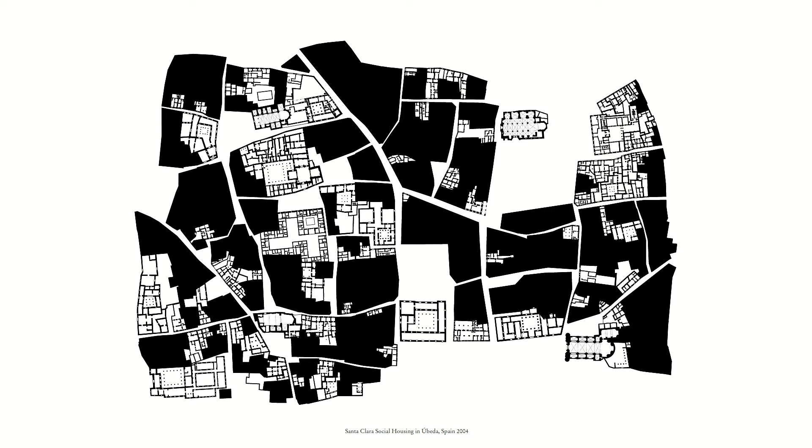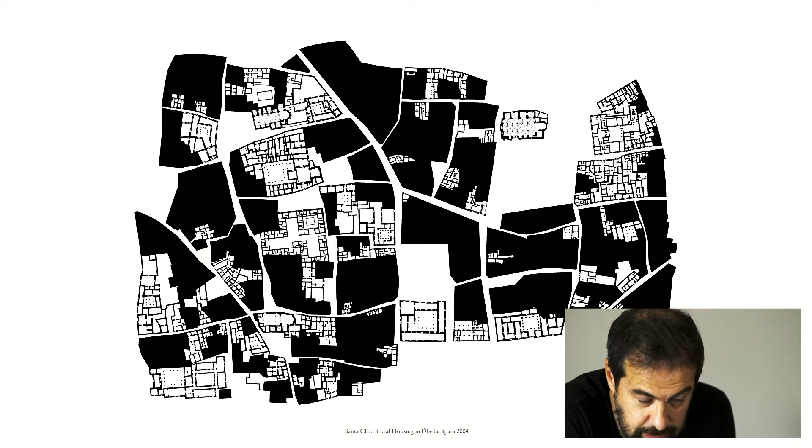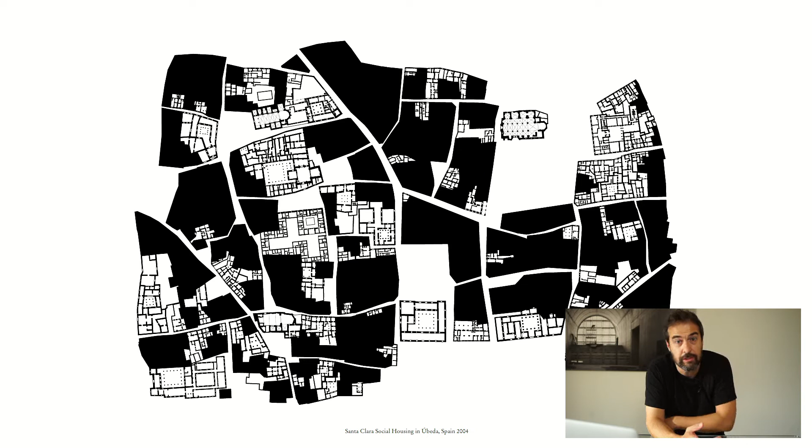In a way this project marked our attitude towards architecture. Since the beginning we tried to work with what we found—with the specific condition of a place, establishing an intimate relationship with the context, whether physical, imaginary, or with the different realities that exist in a place. This idea of working with specificity marked all our early career.

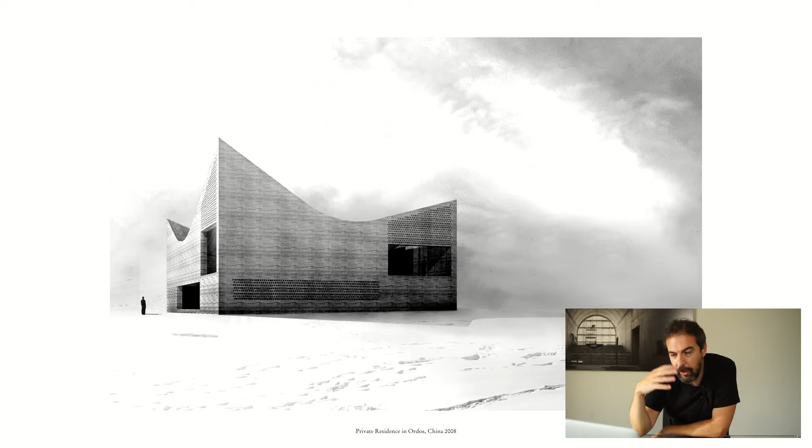In a way our work is based on this idea to work with what we found, with the specificity of the place, but at the same time we are conscious that architecture is an autonomous object.

So at the end our project is based on a dichotomy. On one side we try to find an intimate and sensible relationship with the specificity of the place, but on the other hand we try to give a certain formal autonomy to the building. Exactly in this dichotomy, in this paradox, is where our work is placed.

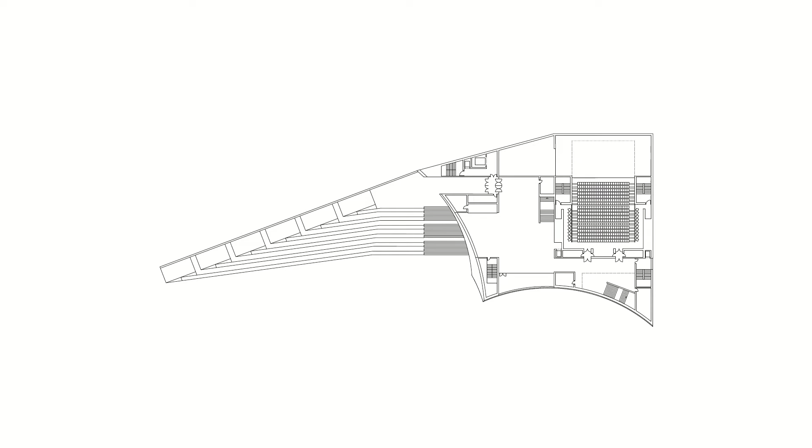And the architecture works as a frame to conform this kind of new urban condition. Here, for example, this huge long ramp and stairs are the urban element able to connect the object through its contextual condition, and it marks the beginning of a promenade, a public promenade that goes inside of the building. The interior, the foyer, was considered a covered plaza open to the sea, from where other connections move to the upper level.

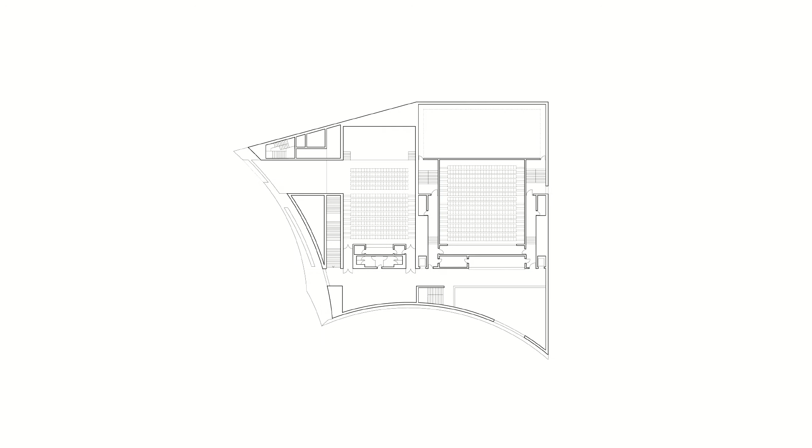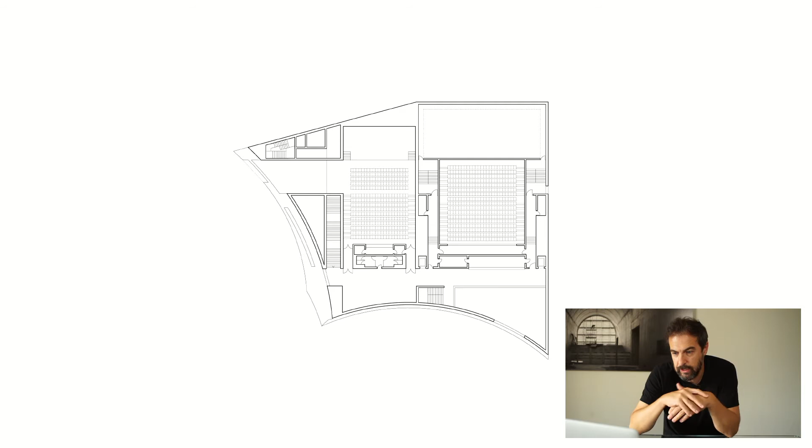All our projects have plans trying to be very simple, very synthetic. They try to solve a complex program through a very simple form. Here, the plan shows very clearly this duality that exists in the project. From one side, how the project is facing the geography, the sea, and on the other side, how the building conforms the new alignment for the city.

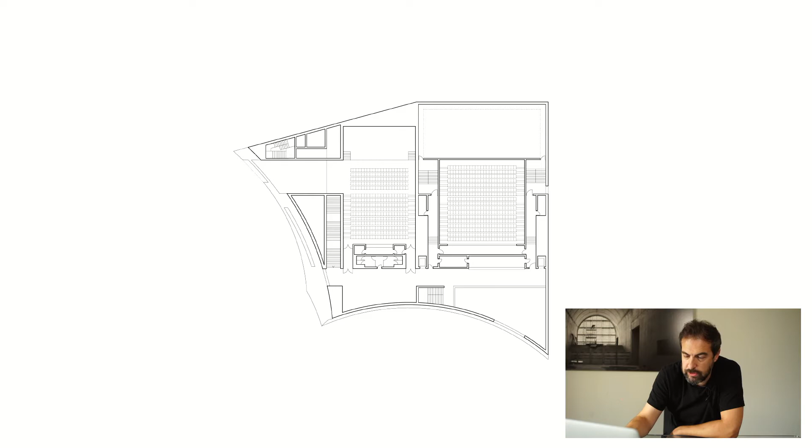With just these two elements, all the project in a way is solved. Interior, there was a small theater that is present in this image. More or less in the same year, in fact we finalized this project at the same period as the previous one. We made a project for a small, let's call it, office building that controls a quality wine in a small town in the north of Madrid.

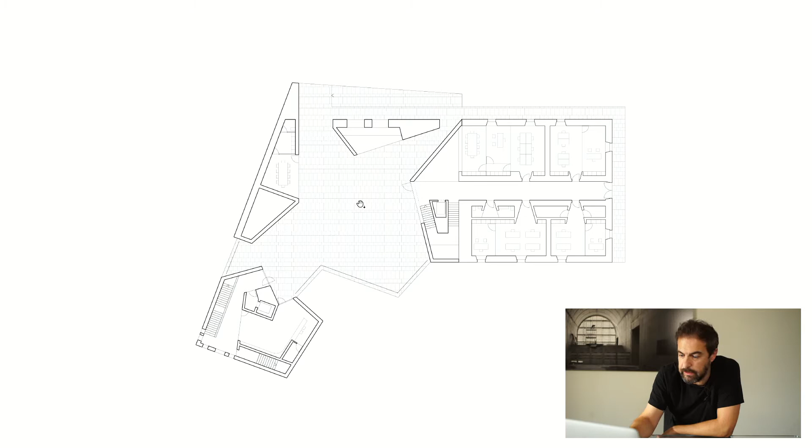This condition, you can find this kind of reflection not only in this project, but also in all our projects. There are these efforts to integrate a new contemporary architecture into a historical condition, discovering new scenarios, new possible ways of new possible architecture.

After these first two projects, which have been quite important for our career, we started to work around Europe, especially in Poland, and then in the latest year in Switzerland. The very first important international project we made was a Philharmony in a city called Szczecin in the north of Poland, very close to Berlin.

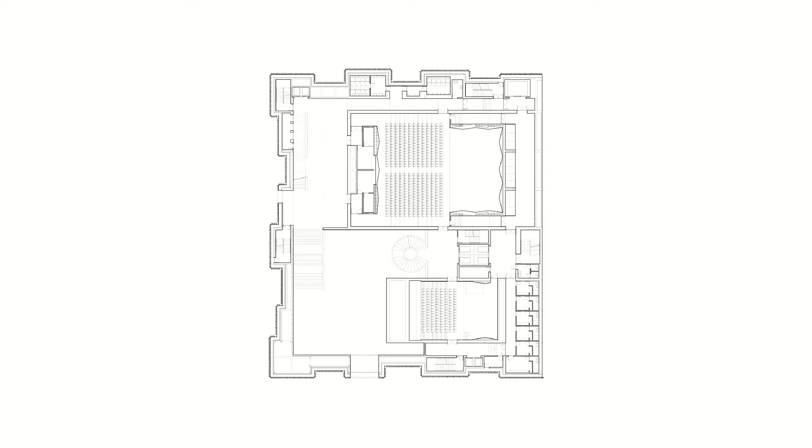At the end, the project worked with the same identity elements that conform the neighborhood—this building very close to the Philharmony has repetition, verticality, steep roofs. All these elements that conform a certain local architecture of the city are in a way present also in the new Philharmony, transformed into a new condition. Again, this is a very complex project, but it is solved in a very simple and precise way.

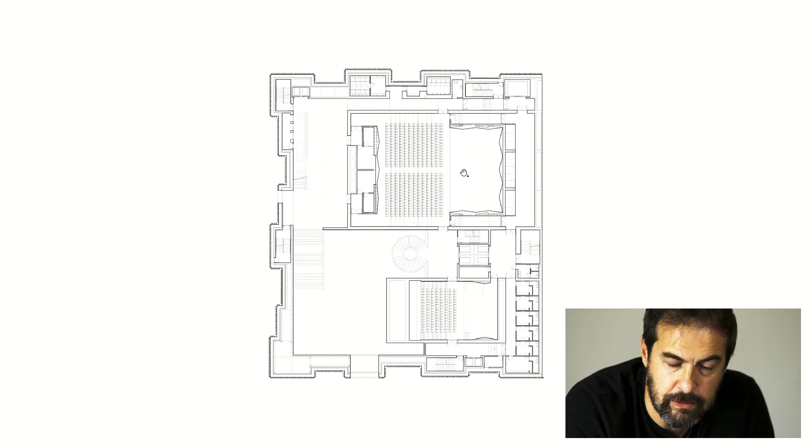There is just this crown that contains all the technical and vertical connections. This crown generates an interior open area, some kind of public space, and the two main uses, the chamber hall and the Philharmony hall, float inside of this void.

So in this case, the public space goes inside of the building. The foyer is conceived like a covered plaza.

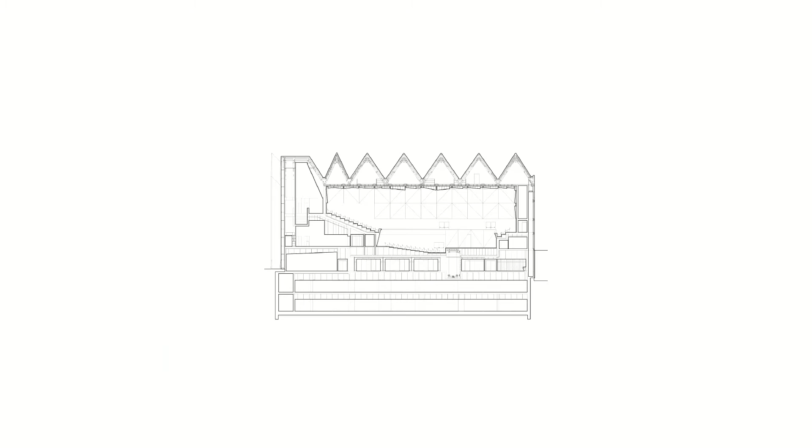Then the other important use of the Philharmony, the big Concert hall, is essentially a reflection about a certain historical typology of concert hall from Eastern Europe. A certain idea of ornament present in historical chamber concert halls has been adapted and transformed, using fragments that are ornamental but at the same time technical elements that help achieve the best acoustics inside this room. Again, it's a reflection about a certain specific tradition, even in these interior spaces.

The project was really the first step of a big urban renovation of an entire part of the city, and for that reason the project changes its appearance during the night. It tries to express the interior activity of the project and make an effort to renovate this area.

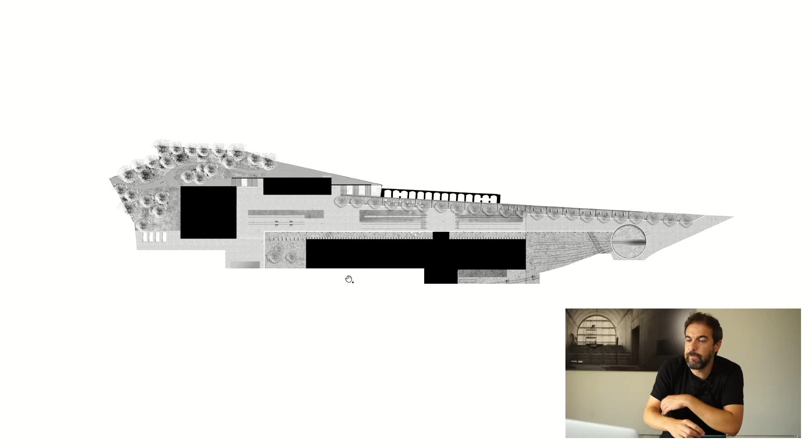The competition and the project were about creating a master plan to organize, in this huge site, the three main museums that exist in Lausanne: the Fine Art Museum, the Museum of Design, and the Photography Museum.

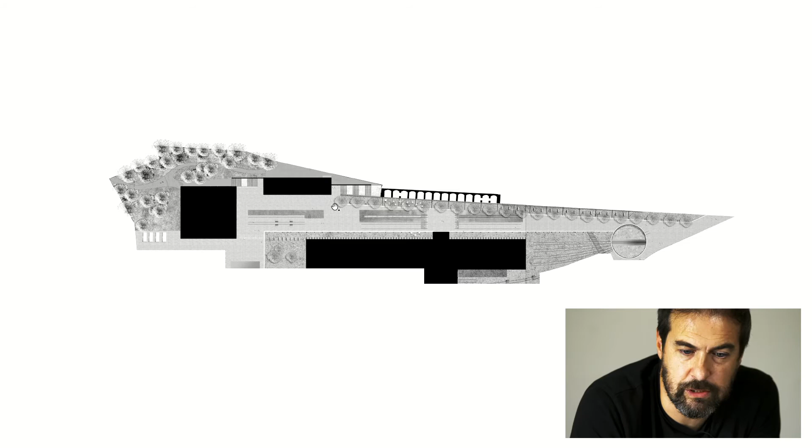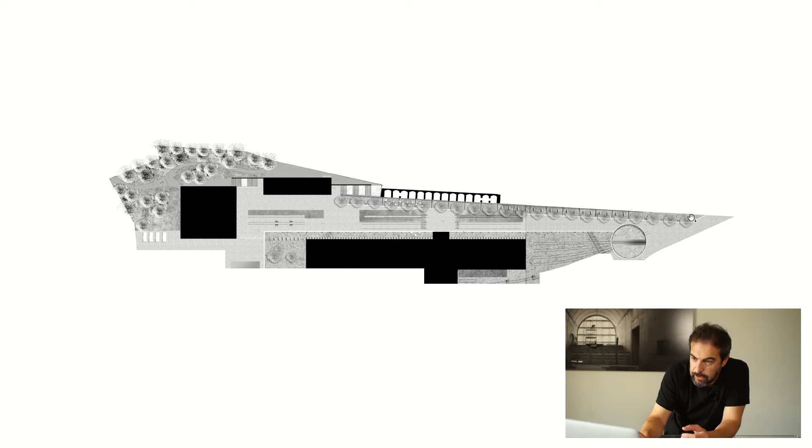This drawing clearly represents our strategy. At the heart of the project, we defined a long plaza, a long esplanade able to connect with the plaza in front of the station, and with this element the effort was to link this new district for art with the city. The three museums essentially conform the frame of this new urban space, similar to the project I presented before, but at a different scale.

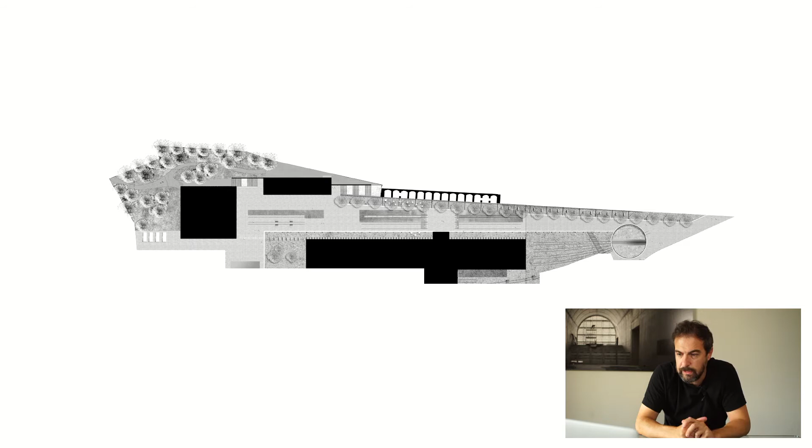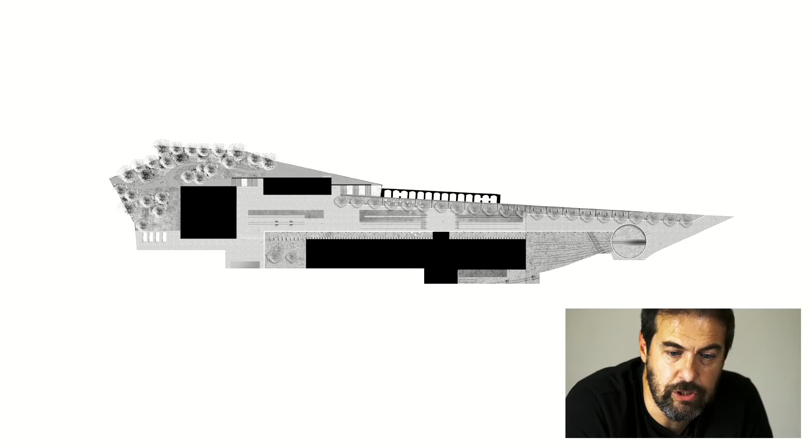This strategy was really important for the project, representing its first step, clarifying the urban condition of the site. After that came the Museum of Fine Art, here—the concept for the museum arrived in a very simple way.

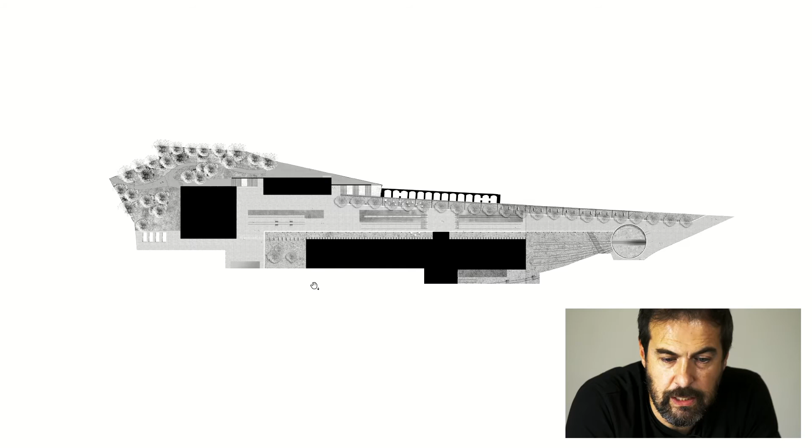The project sits along the railways and has an inhabited wall, able to conform this new public space and to protect the public space, and also to protect the collection hosted inside the building from the railways.

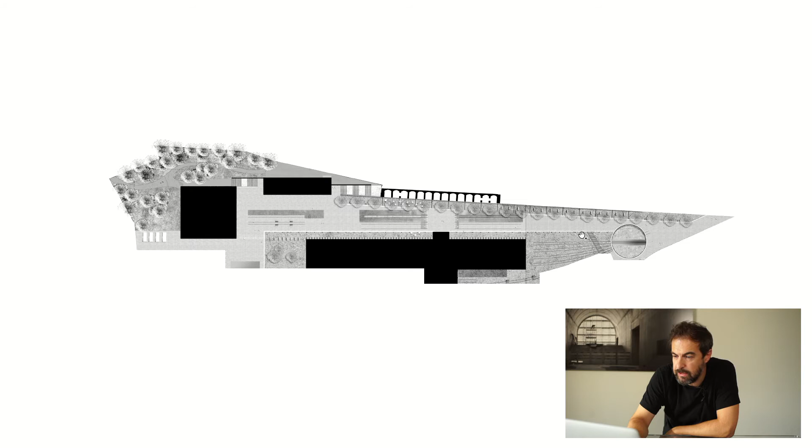In order to elaborate this strategy, several old buildings have been demolished, but we preserved certain fragments here, there, and also this one, because our intention was to conform a collection of fragments of the historical building to give continuity to the memory of this site.

In spite of the dimension, the building sits perfectly into these urban settings, and if we go closer, the building works again with the specific condition of this place.

There is a certain industrial resonance in this project. We wanted to preserve this industrial atmosphere that was present in this area, which essentially was used for the maintenance of trains before.

So the museum is this kind of long inhabited wall, very abstract in a way, an independent building, but trying to reuse this industrial atmosphere to conform the new project.

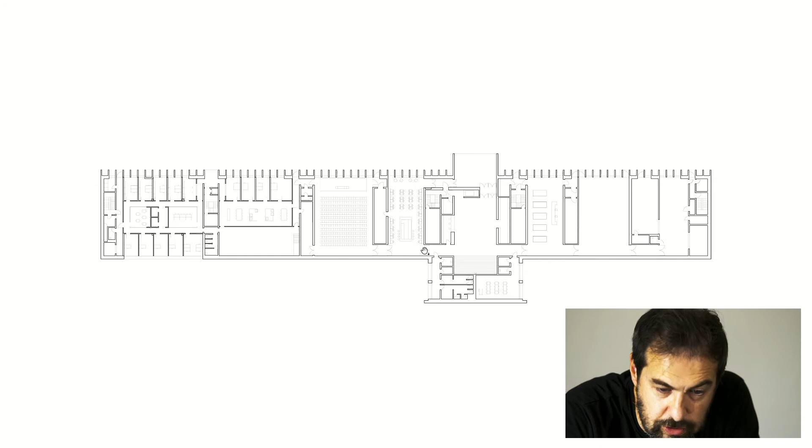Here on the ground floor, you can see that essentially the entire ground floor is composed of public uses: the auditorium, restaurant, foyer, etc. This kind of vertical element gives abstraction to the facade, but at the very end what it permits is to achieve huge permeability between the exterior public space and the interior.

The fragment of the pre-existing building is the key element because we reuse it to conform the new foyer, the main entry of the museum.

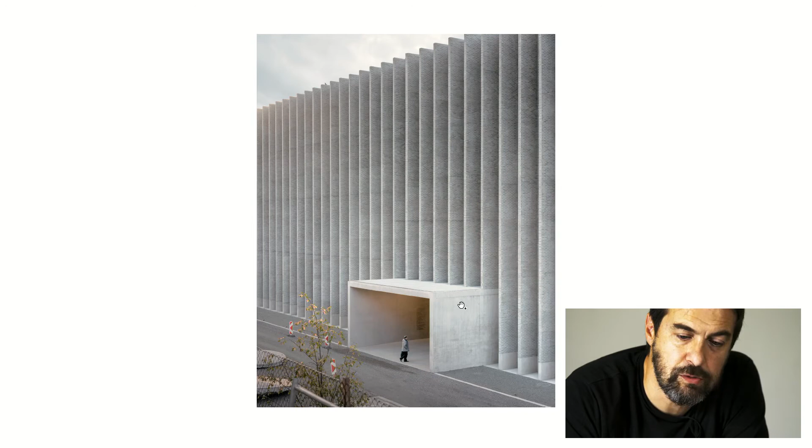From one side, this entry is marked through this simple porch that opens a void into this vertical rhythm. And when you arrive here, you discover the new foyer.

Work with what you found, discover what is specific and identity-giving in a place, give continuity to this element, and transform it into a new scenario. I think this foyer expresses quite clearly this effort that is present in all our projects.

Around the foyer there are vertical connections, some small spaces before arriving at the gallery, that work with light and simple materials. The exhibition on the first floor, the galleries, are very informal in a way, and they bring light from the north facade and in between the vertical elements.

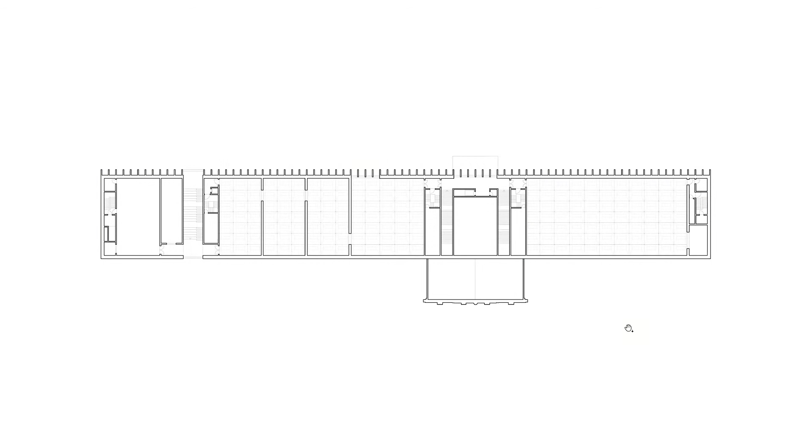The upper floor is essentially characterized by zenithal light. This plan shows the effort we make to design very simple architecture—this huge museum is composed of just five cores that define the main spacing.

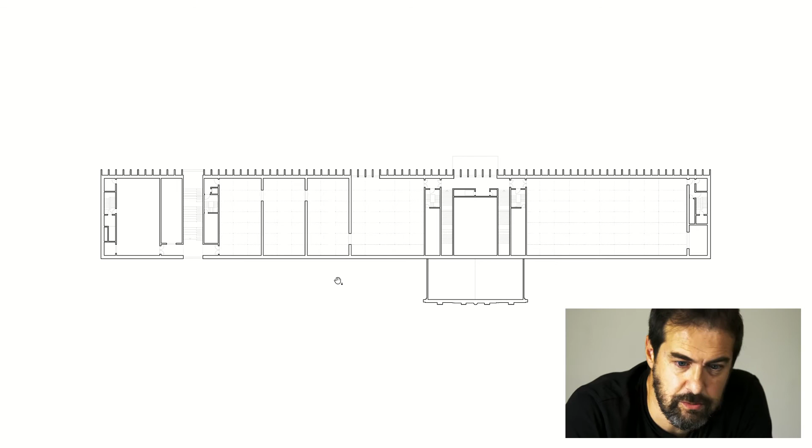In a very pragmatic way, this divides the space between the temporary exhibition and the permanent collection. Everything is very pragmatic, about the reduction of the element to its minimum.

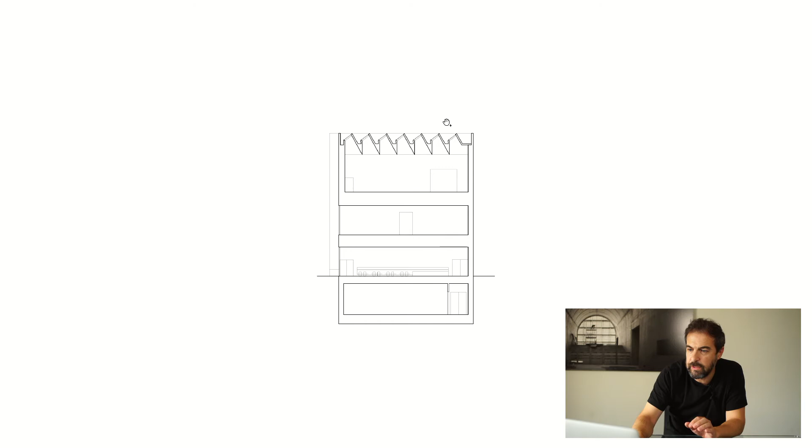The main feature of this second level is the rooftop, conformed by a very complex skylight that brings light from the north, and the entire gallery is characterized by this element.

More or less in the same year, we also made another fine art museum in a small city, always in Switzerland, in Chur, a small city close to Zurich. In this case, the project was about an extension of a historical museum.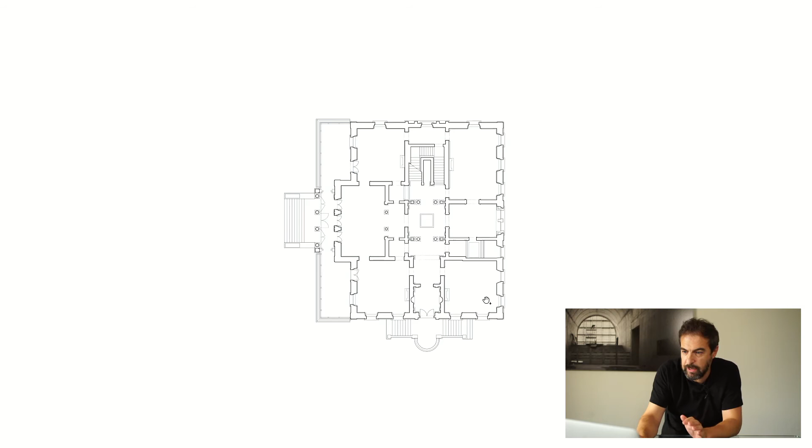The plan, as you can see here, is directly inspired by La Rotonda of Palladio, with a double symmetry that marks a very clear central void here. And the decoration around the building has this kind of Orientalist condition.

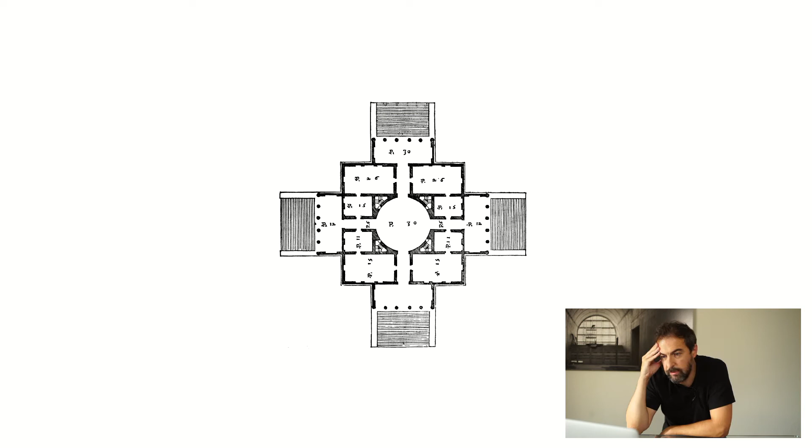So these two conditions marked our approach to the project in a way. First, this idea of a kind of absolute architecture—this is the original Palladio La Rotonda, conformed by this double symmetry, which became important in our reflection. Step by step we started to imagine that the extension of the historical museum should work as a diptych. The same identitary element of the pre-existing building should also conform the new one, so the old and new can create this kind of new diptych, in a way.

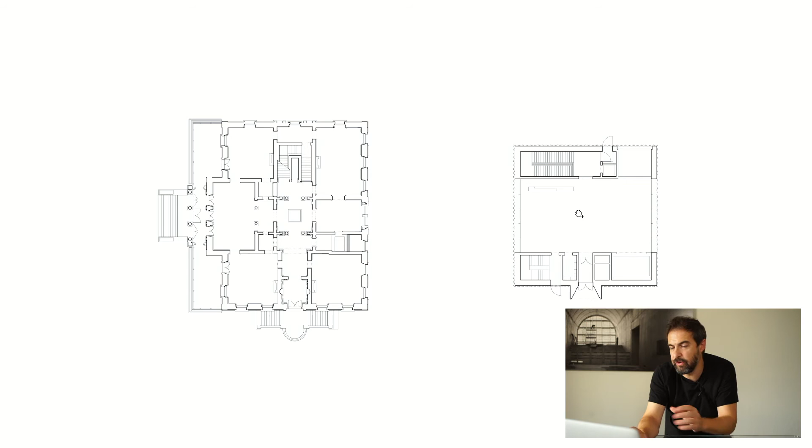Here is the plan that shows the new ground floor of the extension. The geometry is exported from the original building—it's an element that again works with a double symmetry. Everything is combined in just two very simple cores that define a central foyer, a small covered plaza. Again, the whole project is very reduced and synthesized into just a few elements.

So at the end, I present this project as what we could call a neo-Palladian building, because the plan is directly related to the historical villa, and the ornament that marks the facade is inspired by this kind of Orientalistic motif.

Again, it's a building that conceptually works with the same elements we found there, but transforms them into a new architecture. And even if it's difficult to notice here, we tried to reduce the footprint of the building as much as possible in order to generate this kind of mineral garden around it, a kind of basement that supports the new architecture.

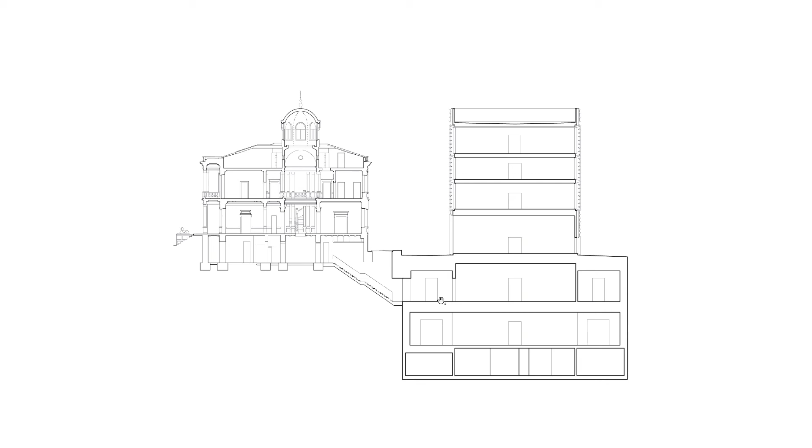In order to generate this public space, we took a very radical decision: the main exhibition area is underground, and what appears outside is just the public uses. This way, we can adapt the scale of the building to the historical building and conform the new gallery in a more general area.

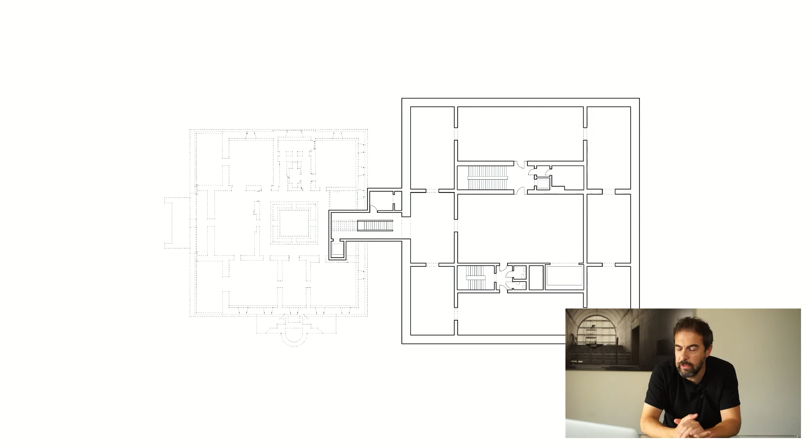The foyer is directly related to the historical building, with the main stairs going down in concrete, and then we arrive at the level of the permanent gallery. This plan shows quite precisely this sequence—the composition is composed of a sequence of rooms following the idea of aggregation present in many Palladian buildings, so the relationship with the historical building is quite clear in a way.

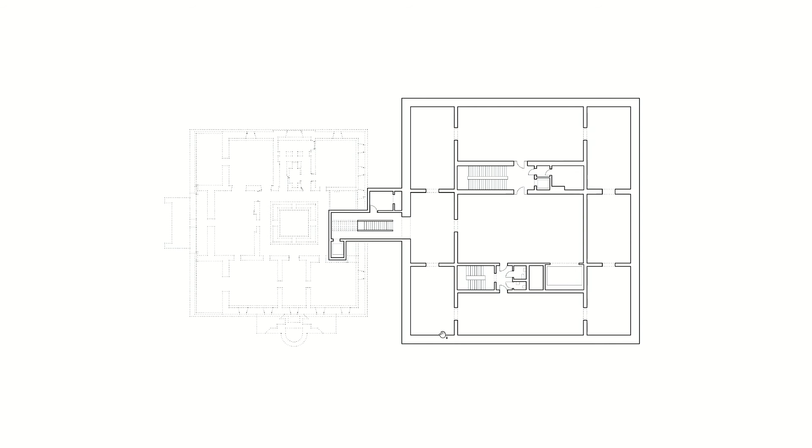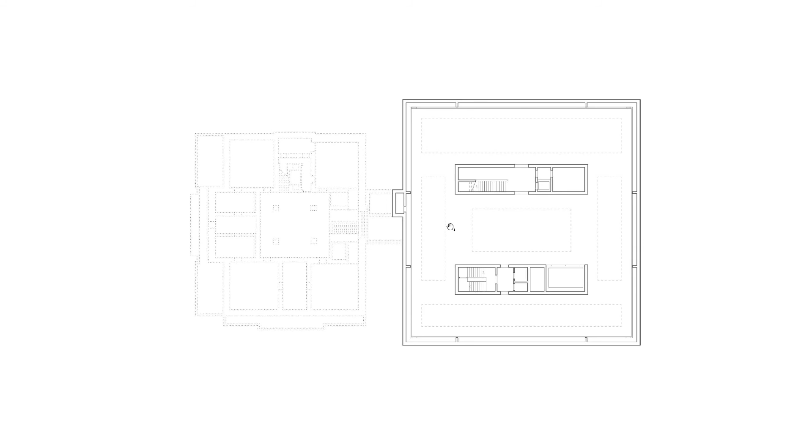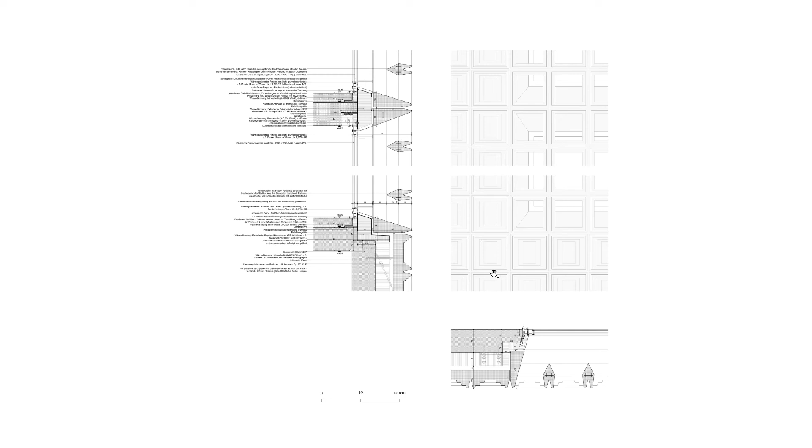This kind of bas relief conforms this kind of ornament, but at the end it's not an ornament because it's something that permits hiding all the technical elements that appear on the facade. It's composed by prefab concrete elements. You can see in this detail that it's carved and conforms this kind of square shape, that conforms this vibrant surface.

The entire concrete facade is working in this way. So sometimes it's just a mass, sometimes it hides windows, etc. And we use the same motif also to mark the delivery door. That is the unique element that creates a dissonance inside of this double symmetry that organizes the entire project.

This element is quite relevant because in order to reduce the footprint, in order to create the plinth, in order to give the right scale of the building, we took a quite radical decision: that the foyer is the foyer, but at the same time is the delivery area for the museum. So this element is, at the very end, the element that permits the entire project to work in a very good way. For that reason we marked this special element into the project.

The last project, the most recent project that we have finished, is a Dance Academy in Zurich, Switzerland. It's a small project that sits along the Limmat River in a very beautiful and fascinating area. It's an area that was an industrial area, but during recent years there has been a huge change. So it's a context full of different buildings, industrial buildings mixed with new residential buildings, etc.

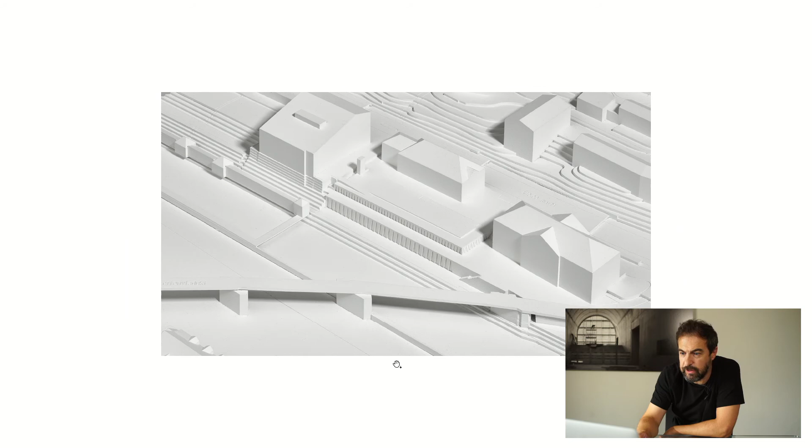Here in the model you can see that in this case the project doesn't define an object, but defines a topography. Our intention was really to generate a new public space along the river, permitting citizens to move again along the river, but also at this level and the upper level, and give again prominence to the historical buildings that sit in this way.

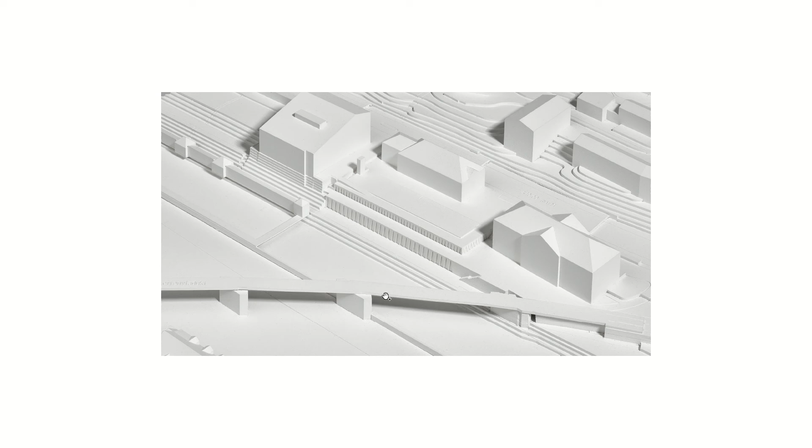Here you can see how the building is inserted with this element that represents a historical bath in wood, very, very beautiful. Here there's a passerelle, around here there's another bridge, metallic infrastructure, etc. All these kinds of infrastructure mark, in a way, the form and the shape of the building.

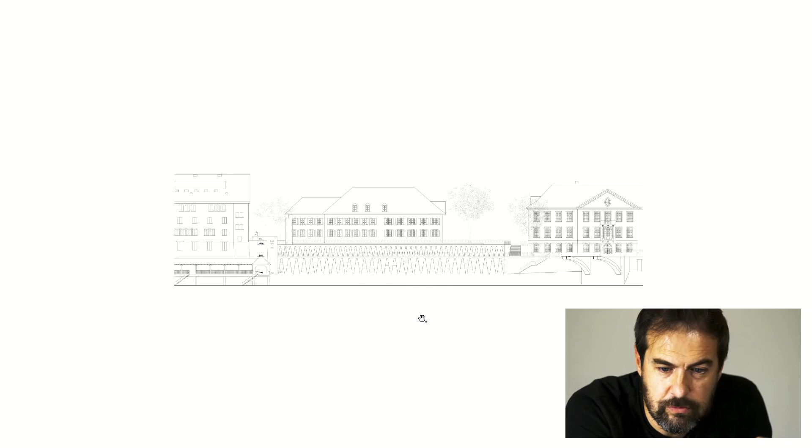In this early drawing you can see the relationship, the attempt to establish some kind of relationship with bridges and this infrastructure that marks the site, and also the effort to create a building that is just topography, avoiding achieving too much prominence in respect to the historical building. So the building at the end is just a plinth, above which sits the other residential building.

The effort of the project was really to reactivate this area, to recreate a new promenade along the river. For that reason we moved the entry to the Dance Academy from the upper street to this new level, forcing people to go down, arrive at the river, and enter into the new foyer located in this area. The effort again was really to make a simple building able to create a new part of the city. There is one specific thing for this project that is really important.

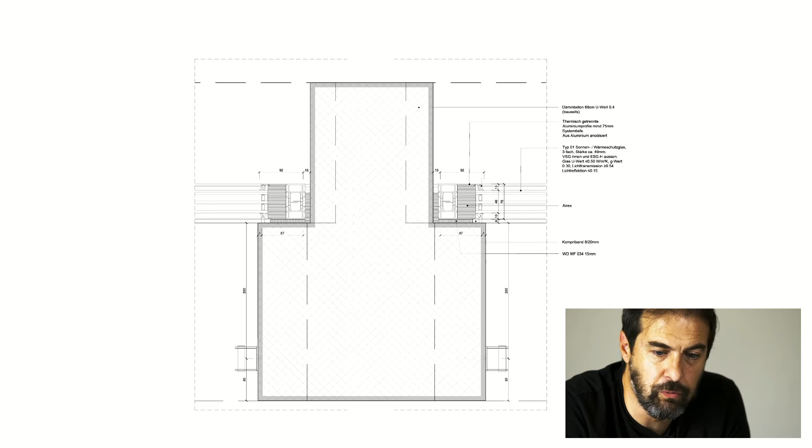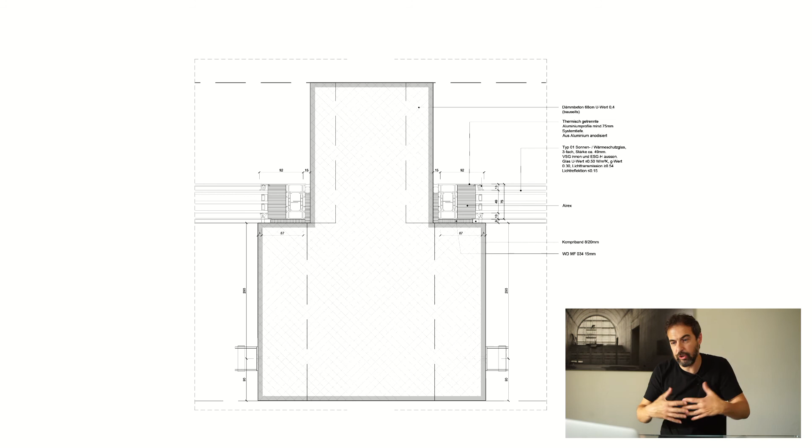Everything is built in concrete with insulated concrete, so there's no layers of insulation. It's just mass in concrete, and the frame and the carpentry are just connected with the concrete structure. This is an effort to really work just with structure, to reduce architecture to structure and nothing else. So this detail conforms the entire project. It's like this in order to avoid thermal bridges, and it's the element that organizes absolutely the entire project.

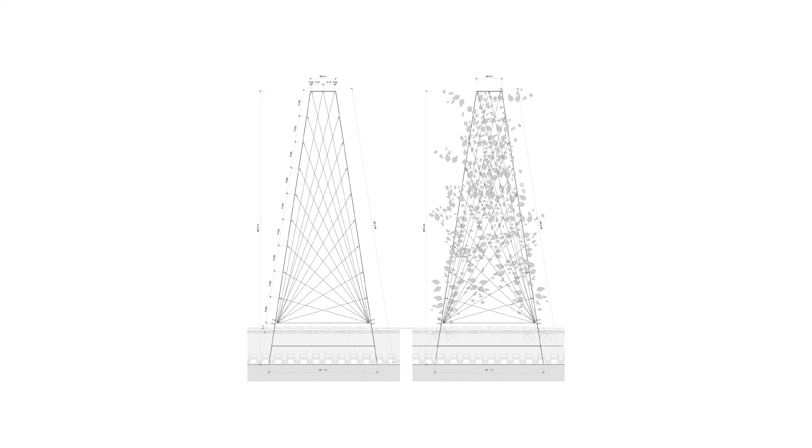And we proposed to the authority to use vegetation as a tool to control solar radiation. So we studied with engineers, agronomers, and other people which kind of leaf and flower we should use, and we tried to plant this element in between the columns. This apparently simple system is the first time that a building uses vegetation as a technical element to control solar radiation, and in this way the project is really at the avant-garde in a way.

The idea is that in the future the project step by step will be integrated with nature, with vegetation that will grow up in the middle of the rhythm of the windows. Also, this triangular form permits control of the solar lighting — more light in the lower part, less light at the top of the facade.

But at the same time it's a form that makes sense from a structural point of view, because it permits working with a concrete that doesn't have a lot of mechanical resistance. So in this way we avoid having to work with this material excessively.

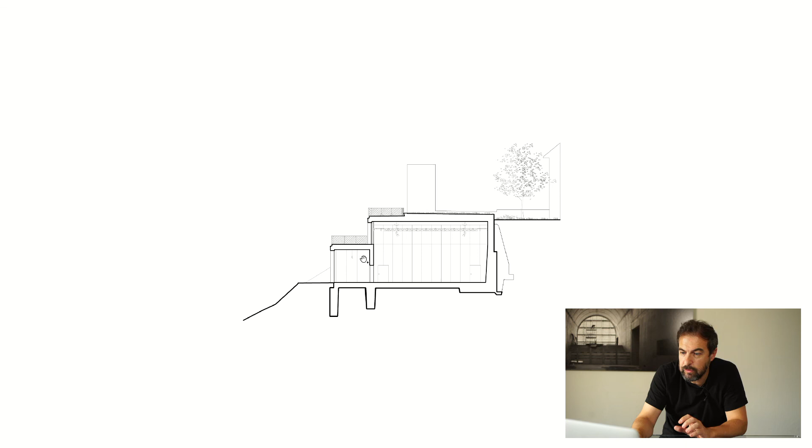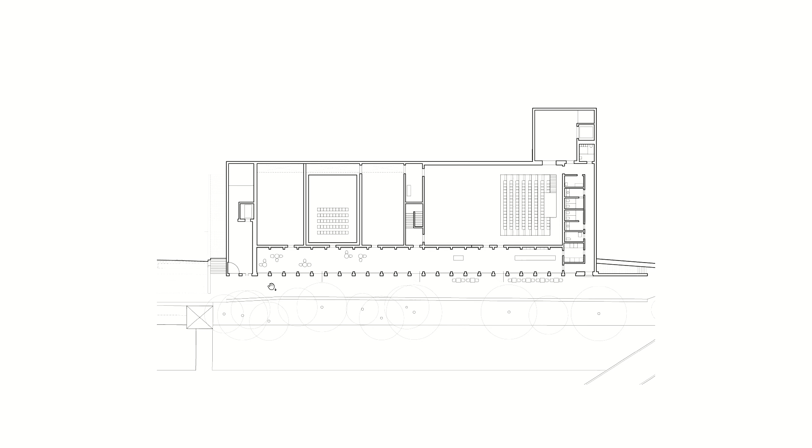At the level of the terrace, a new promenade along the river — the interior space always made in concrete. And the lower level has the foyer, which is an extension of the public space of the promenade into the building. This is the new main facade, with this new promenade created through a continuous repetition of the same element.

So more or less these are the main projects we have built over the last years, since we started the office. After working for several years here in Spain and Europe, the office is now facing two very important new challenges — we've recently started working in the US, especially on two new important projects for us related to culture and art.

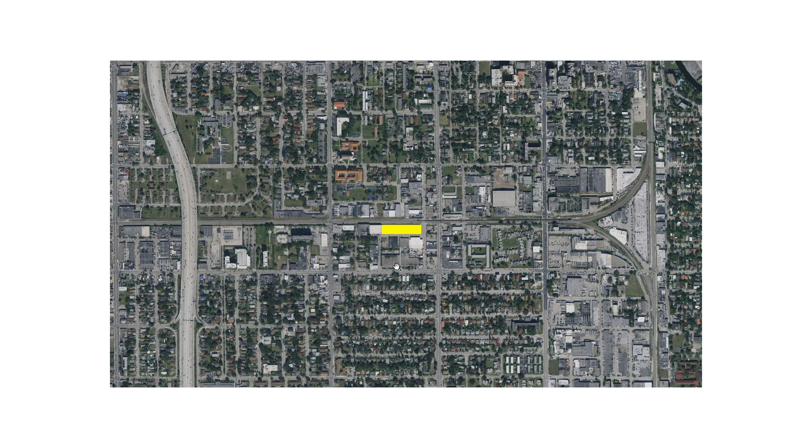In Miami, we will work on an artist residency in an industrial neighborhood, and what we'll try to do is create a new civic building able to reconvert this kind of industrial neighborhood, creating inside the building a new kind of oasis for artist life.

And the other project, which will be really important for us and will probably mark the next 10 years of the office, is the major transformation of the Art Institute in Chicago. After a long selective process, our office has been selected to address a major renovation for the entire museum. The Art Institute is the second largest museum in the US.

It's a museum composed of many different buildings from different periods, with the original Allerton building that was built for the World's Fair. Then there are other buildings, the last one being the extension by Renzo Piano 10 years ago.

So our project tries not just to create an extension, but to renovate the entire campus — addressing and reconforming the connectivity between the buildings, new extensions, demolitions, etc., in order to give clarity and coherence to all these different buildings. The museum is characterized by the train that crosses the campus.

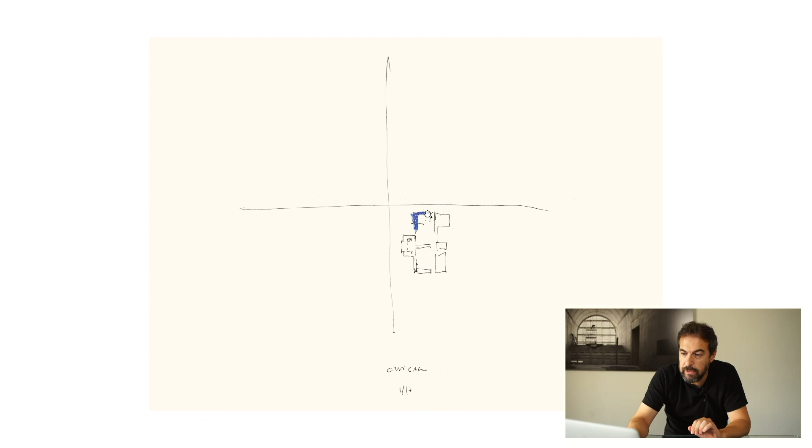The main point will be to try to transform this inward-facing museum into an extroverted museum, able to recuperate the civic and public condition necessary for this kind of project. The project will essentially be based on 4 main strategies, each trying to reestablish a missed link — a direct connection with the city, the train, the gardens, and the lake.

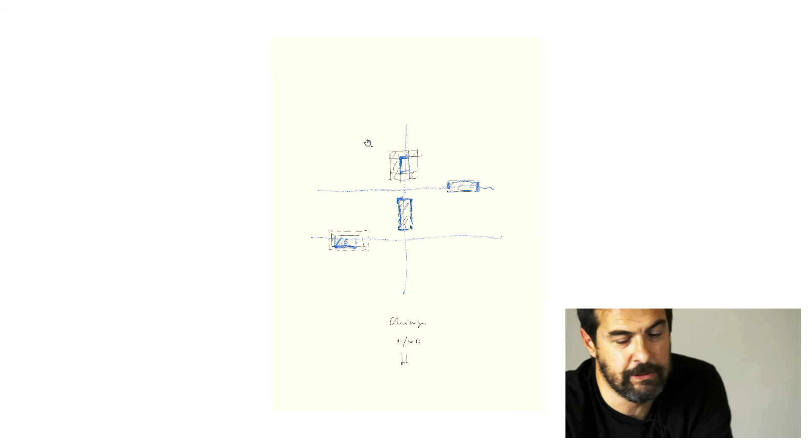Hopefully in a few years we'll have the opportunity to start the work, and maybe in the next presentation I'll have the chance to present this new project. So, thank you.